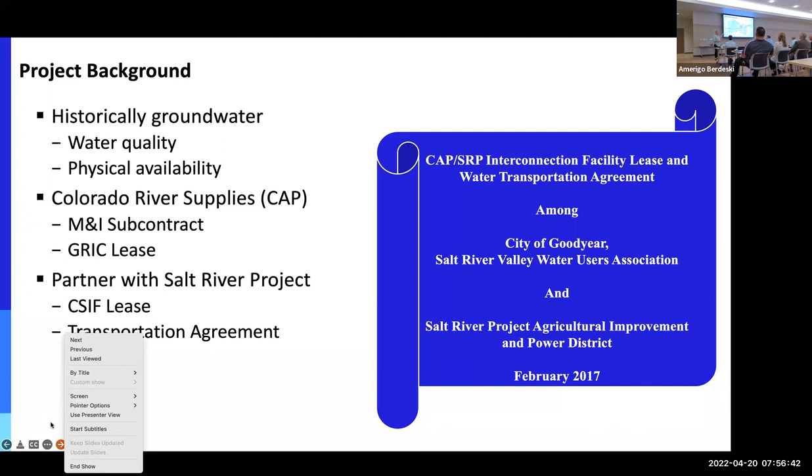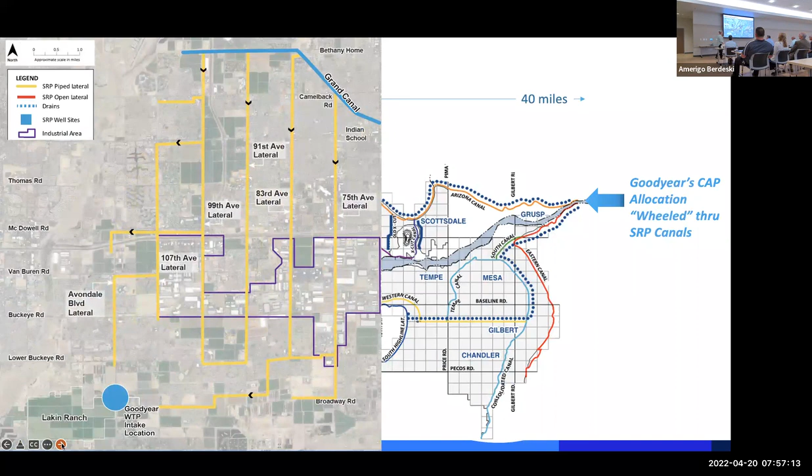Sorry, so anyway, the CAP interconnect is clear over on the east side. Their system obviously is already in place. We were able to leverage infrastructure that's in place, and then get the water to the closest we could, which was Avondale Boulevard at about Broadway. That's their southwesternmost part of their system. And from there, we had to build pipelines, an almost 6-mile raw water pipeline, also a pump station on their lateral.

And then we had bought 30 acres of land just west of our water reclamation facility. And then we need a finished water line once the water is treated to tie into the existing distribution system, which remember was always groundwater in the past. So it'll be a whole new source. 8 million gallons per day was the size for the surface water treatment facility. So yeah, you can imagine, right?

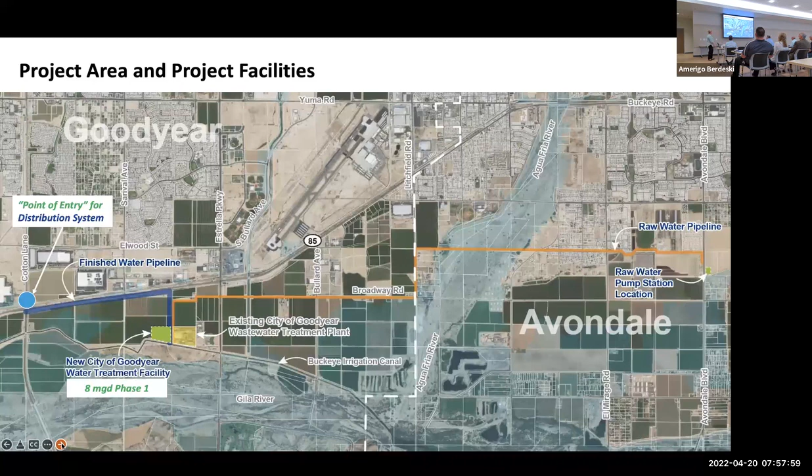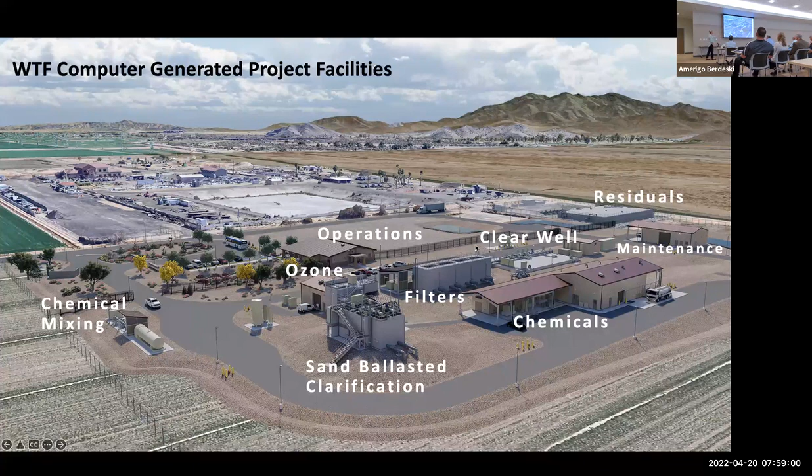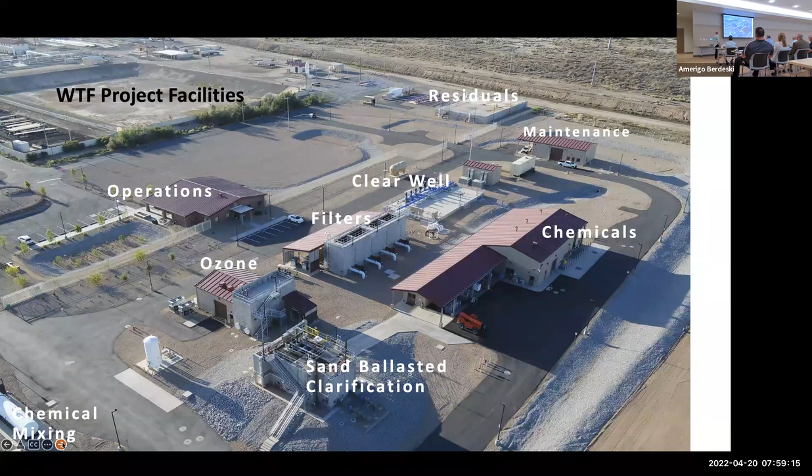I always like to compare that with this, the constructed facility. You see the same points. I couldn't get quite the same angle with our cameras we have out there, but you can see how very similar that plant wound up from the 3D models to what we actually built. So that was an interesting photo.

One of the most important things for us as a utility provider was during our design process, we modeled our distribution system. We took estimated demands from 2025. We said, okay, based on IWMP, our integrated water master plan, what those demands would look like. And we prepared this graph, which shows that we will be base loading our system with surface water.

That's the blue bar. And then we have a groundwater system still in place that will make up for those peaks. We did show in February, SRP usually does some maintenance, so we dry up, and that's the time that most cities will shut their plant down and do any maintenance. So this was what we used for our demands.

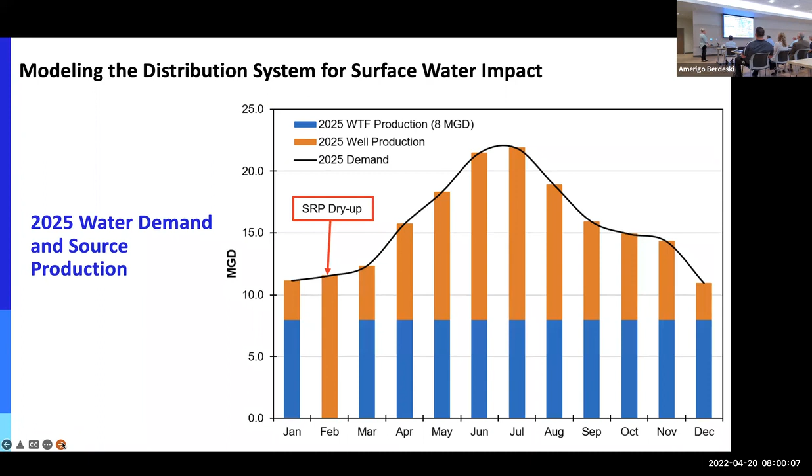Some of the key things we found in doing this, which is really important, we had about 80 miles of pipe that were going to have reverse flow. So you can imagine what would happen inside those distribution pipes that over years have developed some sediment, some biofilms, just standard operation. Pipes will get some coatings on the inside, and you start to reverse those flows, and you're going to have all that slough off. You're going to have a lot of water quality nightmares.

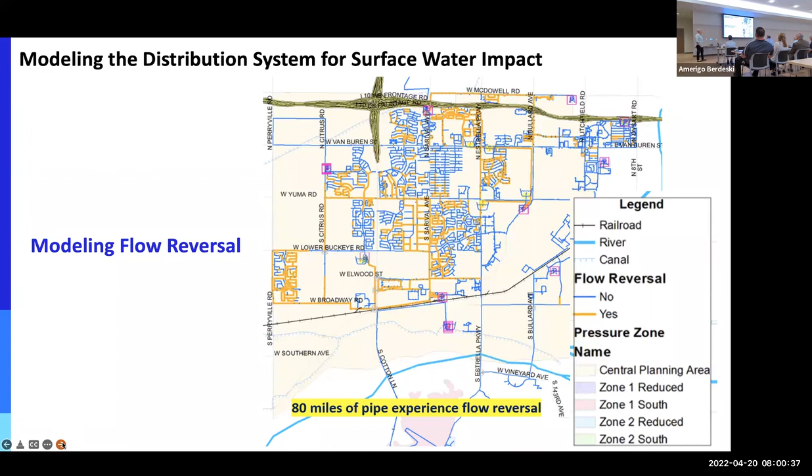Some other findings was we wanted to look at where that water would migrate through the system, what percentage of surface water, groundwater mix we'd have in different areas, and how old water was going to get while it was out there. So age is important for water quality, because once you add a surface water supply that has more carbons than your groundwater, and you disinfect with chlorine, you get what we call disinfection byproducts, which is usually THM or HAAs. So we'll get into that a little bit more.

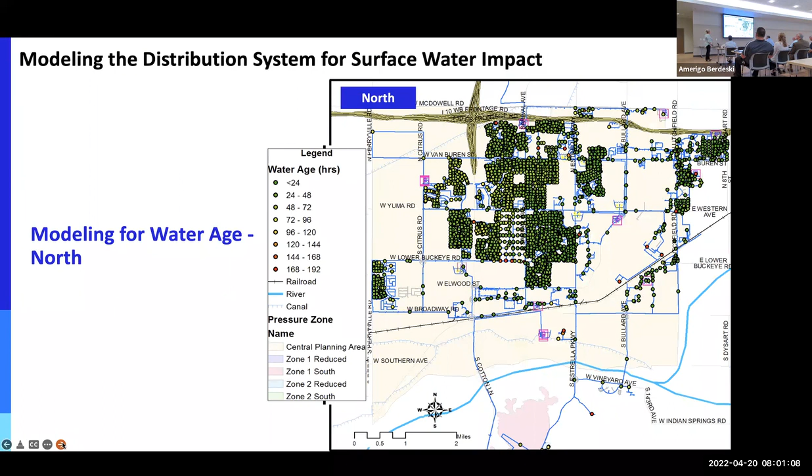I don't know if you guys have ever had a coffee pot, like if you have a Keurig, and you put clean water in it every day, and it still gets this weird kind of a film on it, and you're like, where did that come from? This is clean water, right? That's just a naturally occurring, almost like a biofouling buildup on pipes. The challenge is, how do we get this out before we reverse flows and insert this new water source, so that this stuff doesn't wind up in our customers' taps? That was really important to us.

So our goal for the system was to reduce the scales that were formed on the pipes. And this was probably one of the most important things to me, right? Everybody's heard of Flint, Michigan, right?

We don't want to be popular like Flint, Michigan, right? We don't want it to be in the news, but essentially that is what happened in Flint, Michigan. They changed the supply that was in their drinking water system. And that simple change in water characteristic, change in pressures, change in flow direction, those sorts of things will really impact water quality. So this is when my director would start telling the city manager, this is the scary part. Like building that plan, doing all the work, that wasn't any big deal. This was the scary part for us.

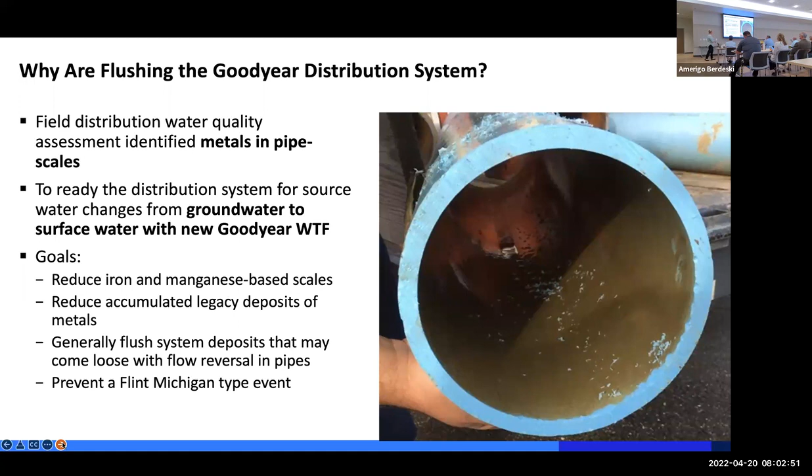So we did some testing to see what velocities we needed to flush at to get that stuff to remove. And you see, this is kind of a standard flushing operation, right? We see a lot of hydrant flushing, even through normal operation and maintenance of a distribution system, you'll see some flushing here and there, to make sure our chlorine residuals stay up.

And so we had our partners, Jacobs, come up with this unidirectional flushing plan and how we were going to get through the system. And the city, I want to tell you, we chose to just do the entire, every main in the system. There were some areas that had a higher priority - these really need to be flushed, these you probably want to flush, and these you might not need to. But we said, no, no chances, we're not going to risk it, we'd rather just do that. So we estimated that was going to be about 8.5 million gallons of water we were just dumping out into the road over the series of 8 or 9 months that we were doing this flushing program.

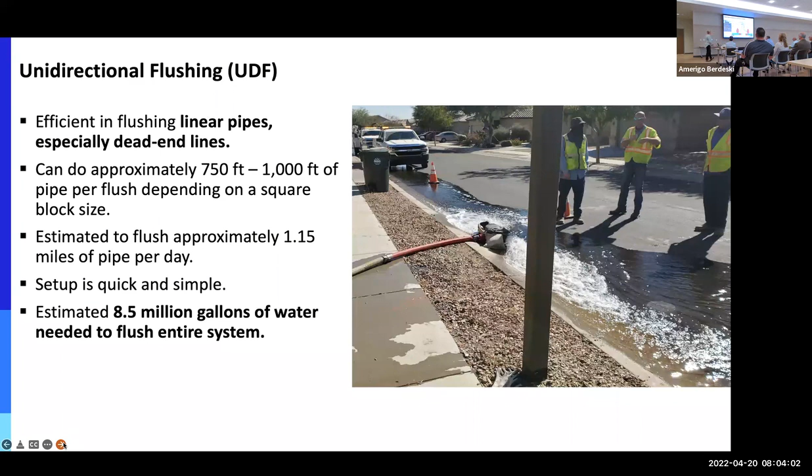So one of the cool things we found, or Jacobs located for us, was this - we call it the NO-DES truck. It was a truck, and there's a picture of it here. Essentially what it does is you hook up to 2 different hydrants, as shown in this little cartoon, and there's filter bags in the truck. So you take the water, you can flush your system, but instead of throwing it on the ground, it runs through the filters on the truck and goes right back into your distribution system. So you don't waste the water that you use to flush that out.

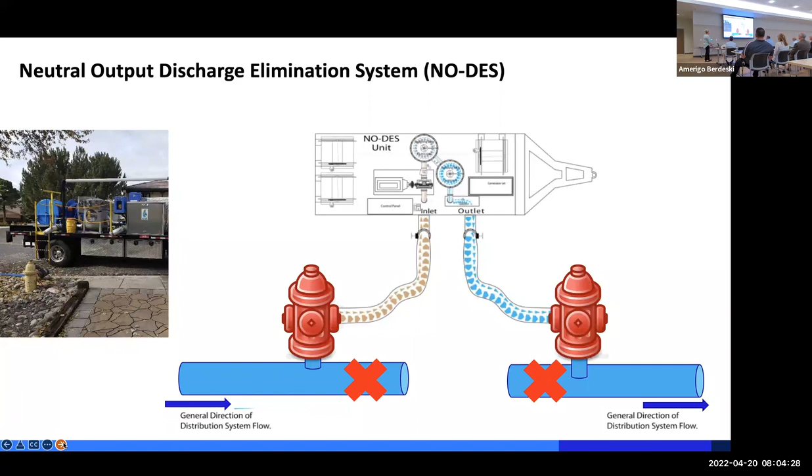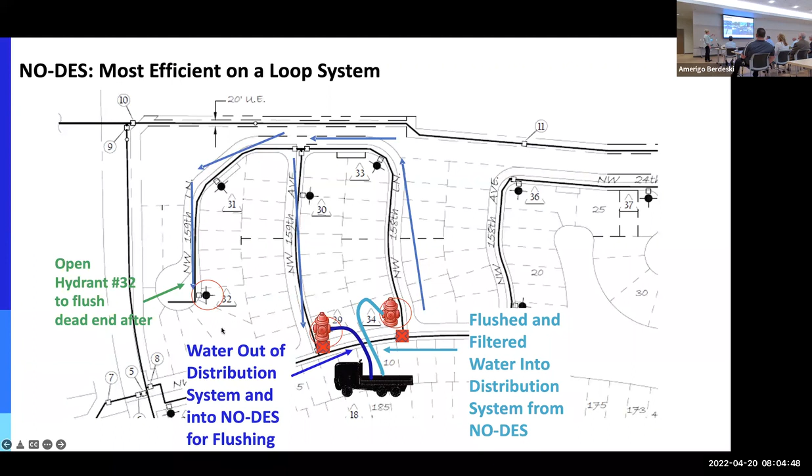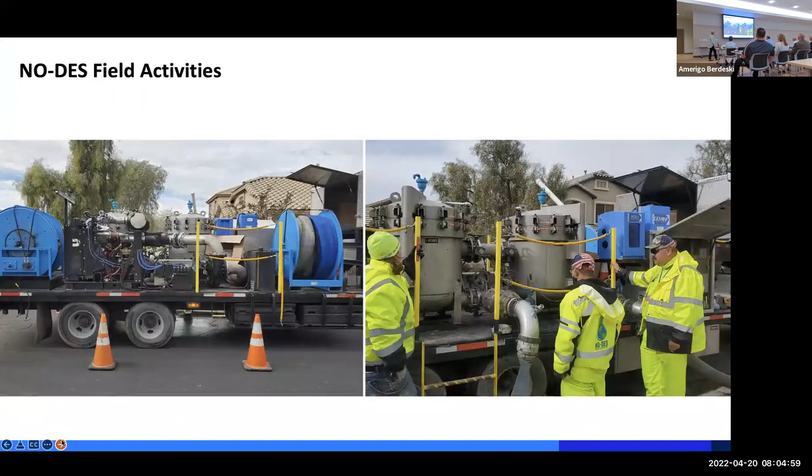So how effective was it - I put this together yesterday. Here's another image of how the distribution system is. We isolate certain areas through the operations of valves and then hook the truck up to a couple of hydrants. It's kind of a cartoon image. Again, this is the unidirectional flushing. Some areas had to be flushed this way because we didn't have a good loop. This is the truck and the operators of the truck, and here's the bag filters.

And it's crazy, we had 2 phone calls when we turned this plant on, for the entire service area - the south, from I-10 south. We had 2 phone calls. One, when we responded to it, wound up being a water softener in their garage that wasn't maintained properly, and they were sucking brine in their house. The second one, the husband was complaining and thought the water was off, something funny. We didn't do a huge advertisement at first because we knew it would be in people's minds, but he had seen somewhere that we had turned on this thing. His wife told us he's crazy, don't listen to him. So those were the 2 calls we got for water quality.

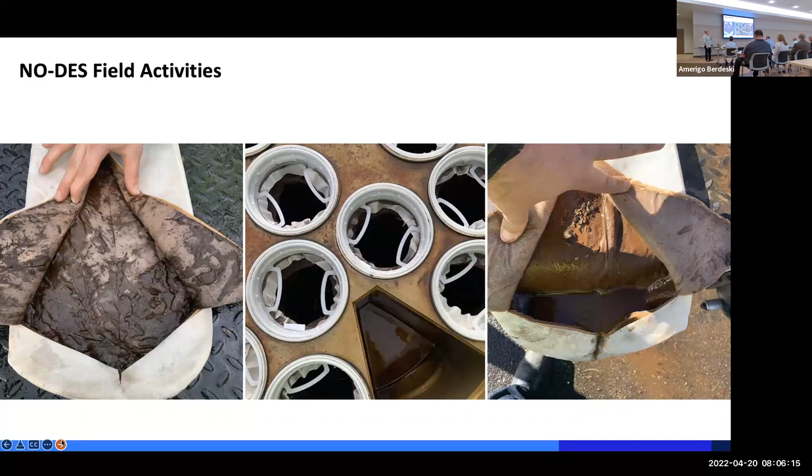So it was amazing - we did have a huge outreach program for it. We had hired a third party, we had a website, we had a hotline. Again, every week we'd get a couple calls or emails, like 'hey, my garbage can didn't get picked up.'

Or, you know, someone was trying to get out of their driveway and maybe we had a hose in the way or something. But really, our city hall never even knew we were doing this. If we didn't tell them, they would have never known we did this program.

It was done so low key. We tried to keep everything quiet, we don't want to alarm people. I'm in public works, I do water and wastewater services, and if no one knows I exist, we're doing a really good job, right? We don't want to be in the paper. We don't like to be noticed too much.

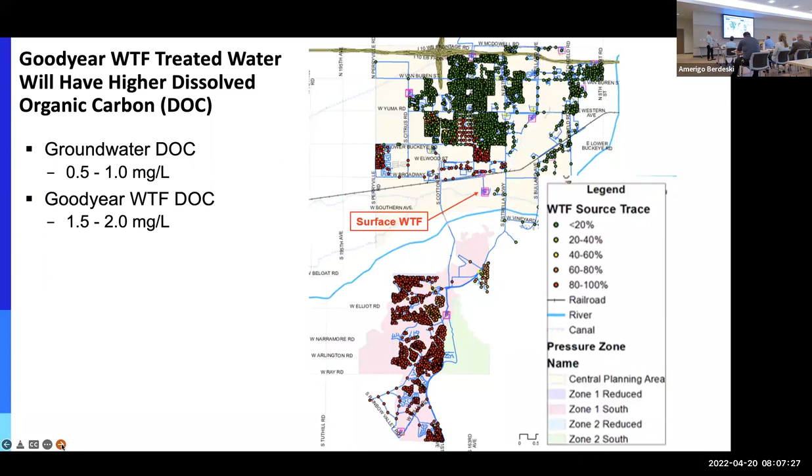So one of the other things we talked about was the disinfection byproducts and the water age. During the modeling, we found that the water would be the oldest in the southern part of the city, in our Estrella Mountain community. It's a unique part of the system as we have two distribution or two transmission lines. They feed storage tanks and booster stations, and everything is distributed from those two sites. So that made it easier.

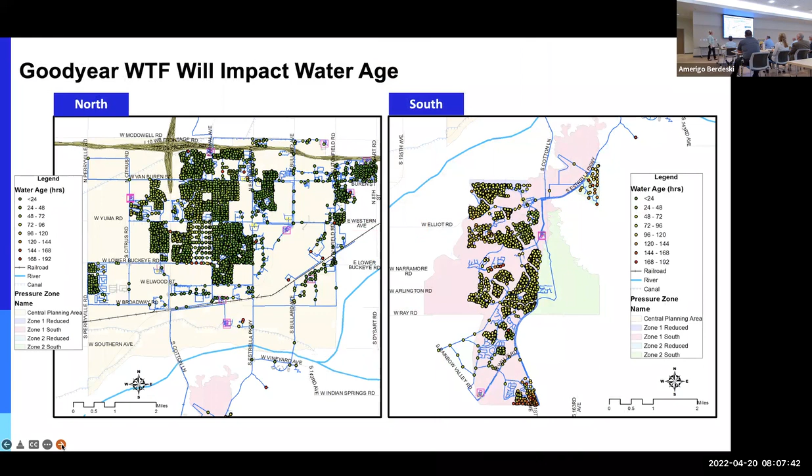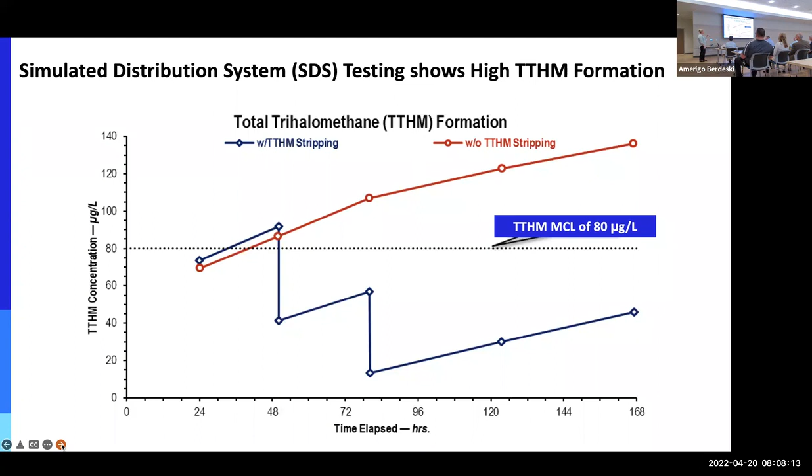The project also included some systems we call PAX systems. We created a separate project, and while we were building the plant, we had to hurry and get this done, so it was in service before we turned the plant on. We were able to successfully get this project completed as well.

It includes basically three components: your mixer, your aerator, and your vent to ventilate them. These THMs are what we call volatile, so once we get them aerated, they will escape into the atmosphere. We can get rid of them that way.

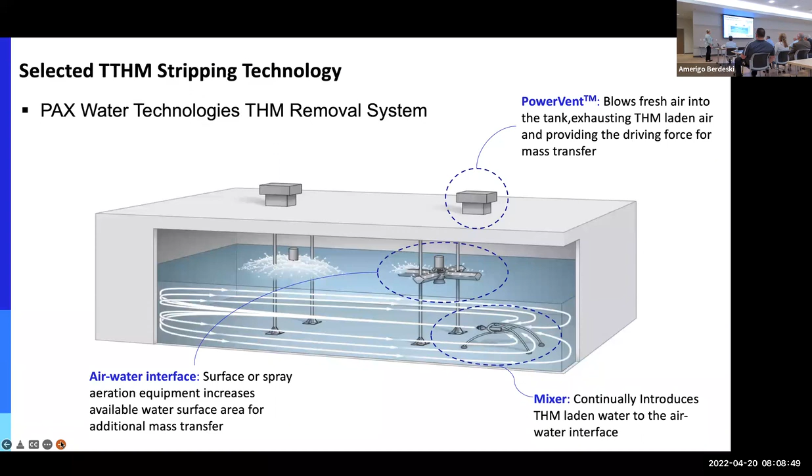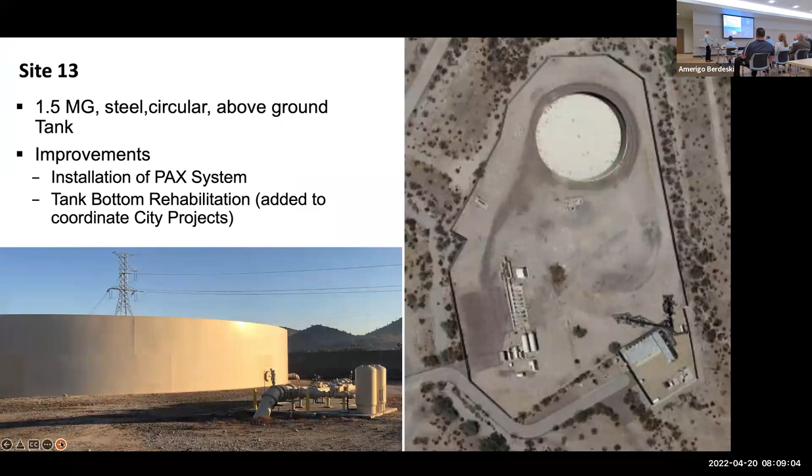So this was another water quality concern of ours. Here are the two sites, 13 and 23. Site 13 has a 1.5 million gallon tank - we had to do some floor repairs anyway, so we put it all in one project and knocked that out. Site 23 is a 5 million gallon concrete storage tank with a divider, so we can separate it into two, 2.5 each, meaning you can take one out of service while you're working on the other.

These two sites serve the entire Estrella Mountain community in the southern part of the city, and again, no one even knew we were doing this. I later took our council on a tour of this facility, and a council member who lives down there said, wait, what? We're getting this water already? And I said, yeah, you've been getting it since December. So that was, to me, a good sign - we don't want anybody to know. So that was a quick presentation. I wasn't sure how much time I had this morning, but if there are any questions, I'm happy to take them.

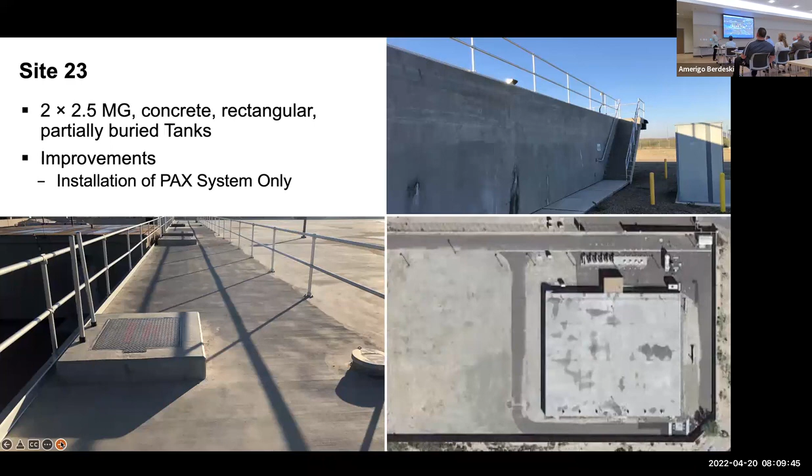Yeah. What pH are you finding getting on your water? Believe it or not, it was very similar to the groundwater we had, so we're around 7.5 to 8.2 maybe.

Before we developed the plan, through all the modeling we did the computer modeling, but we also did a lot of water quality analysis and compared things like corrosivity of the water that's in the system now, the pH that's in the system now, all those things, and we compared them with what we bench tested through our treatment process. We had a small scale bench test, and we asked, how different are they? We were fortunate that they weren't too different, not a big swing in their index or anything like that. Any other questions?

I guess, what's the timing for phase 2?

Have you seen the paper lately? I don't know if there's any water in Lake Mead to put through a phase 2. So we don't really have a plan for phase 2, but it's going to come out in the 5-year CIP, not fully funded, but in the second year out, 2027, there's going to be a direct potable reuse pilot. So that's our next water source.